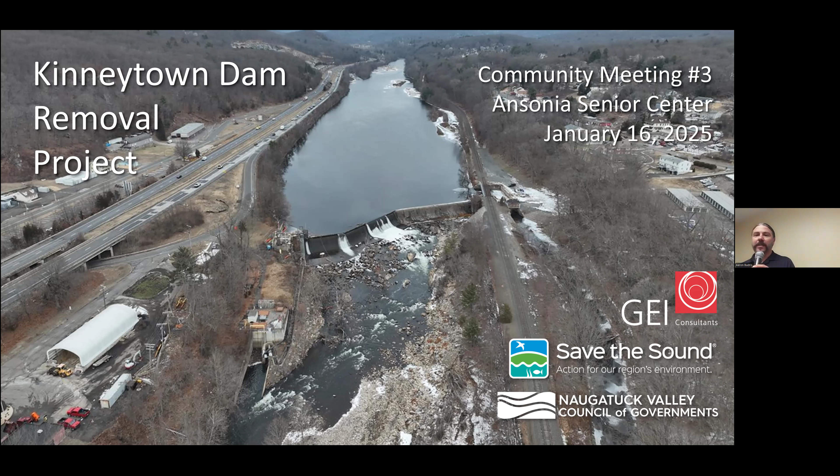So we'll do some introductions, go a little bit through the background, go through some project updates that we have from the last meeting, and then we're going to introduce the engineers that are now on board, that are going to be overseeing this project.

My name is Aaron Budris, I'm the Environmental Planning Director at Naugatuck Valley Council of Governments, or NVCOG. We are one of 9 COGs in Connecticut, set up to conduct regional planning, help coordinate municipal efforts of member communities, support municipal planning, and provide services and assistance as needed. Our board, our bosses, we report to the 19 chief elected officials of our 19 towns, and we work mainly on transportation, land use, and environmental planning issues.

I'm joined tonight by some of my colleagues at NVCOG. Craig Stevenson is a project manager, Craig's in the back there. Ricardo Rodriguez is our brownfields coordinator. Desiree Blanchard is our communications and community engagement coordinator. Christine O'Neill is our environmental planner, and Rick Dunn, our executive director, is in the back here.

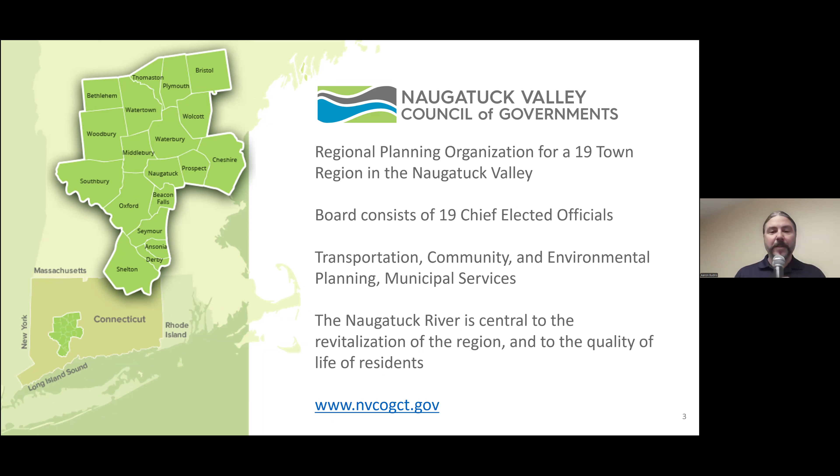I'll hand it off here to Paul. Thank you, Aaron. My name is Paul Woodworth, I'm a project manager and the director of the ecological restoration team at Save the Sound. So I manage both staff and projects and the staff that are managing projects. Save the Sound is a regional environmental nonprofit that works on environmental policy and climate policy. We protect open space lands, we monitor water quality in Long Island Sound, and we watchdog polluters, and we implement restoration projects much like this one.

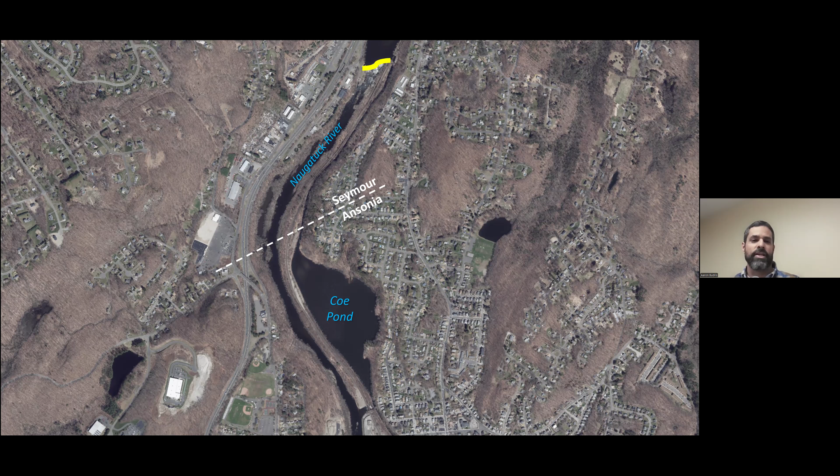Shifting now to a close-up of the Kinneytown Dam - we've been talking about Kinneytown Dam, but Kinneytown Dam and the entire hydropower site there is actually a combination of structures. This is the Kinneytown Dam, that's the footprint of it, 22 feet in height, a concrete structure, about 450 feet across the channel. That's a recent aerial of that.

But the other feature that's been brought to light, which I think has been ignored over the years as this was being maintained or operated as a hydropower facility, is this other earthen dam that extends the full length from Kinneytown all the way down to the Ansonia spillway. This earthen structure contains the canal, a canal reservoir, and also the Coe Pond Dam. The canal is only about 5 or so feet of depth of water, but Coe Pond itself is like 15 to 20 feet of depth of water, so very different features there.

Running parallel to that earthen dam is the Waterbury Metro North line. Up near Kinneytown, the Metro North line is close to the river banks. But as you go downstream, or south, that rail line drops down in elevation, and it's at the toe of the Coe Pond Dam, about a 15-foot earthen dam that stands above the rail line there.

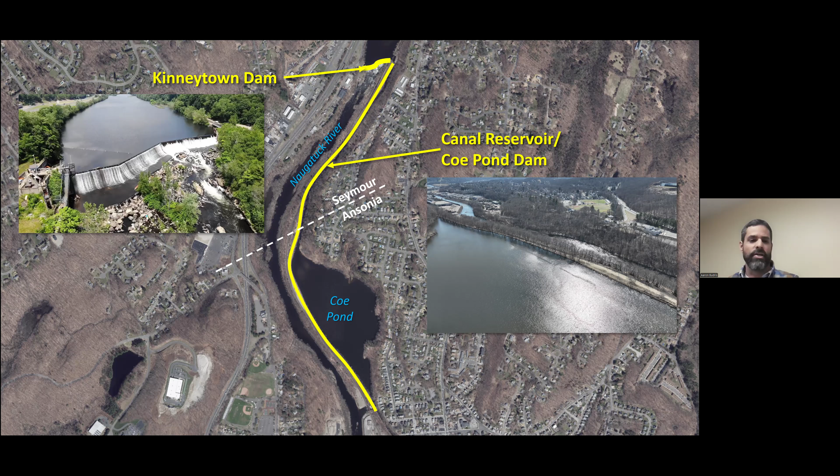So really, it's a complex of multiple structures. The Kinneytown Dam has a canal gatehouse at the top, or the north end of the canal, and the canal itself that extends. Kinneytown Dam is comprised of a powerhouse, which we call Unit 1 powerhouse, and its fish ladder. Then down on the south end is the Ansonia Dam spillway with its Unit 2 powerhouse.

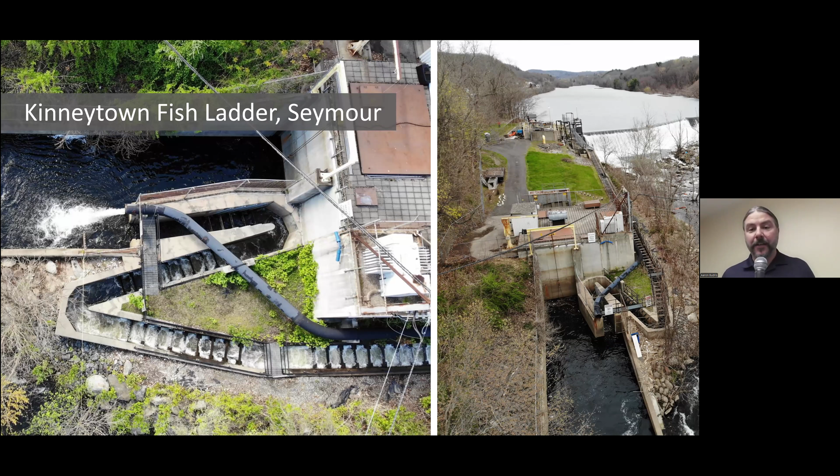What we found out was that fish are supposed to be able to pass Kinneytown. As a hydroelectric facility, Kinneytown Dam is regulated by the Federal Energy Regulatory Commission, or FERC. In the 1990s, FERC called on the dam owner to facilitate fish passage as part of the implementation of a Connecticut DEP effort to remove barriers to fish passage all along the Naugatuck River.

A fish ladder was constructed at Kinneytown Dam in 1999. That ladder has never been effective, especially since around 2013 when the Unit 2 powerhouse in Ansonia went offline and has never been returned to service. That completely altered the flow of water over and around the dam.

The potential to restore fish passage through the ladder was dealt another blow in 2020 when Unit 1 powerhouse went offline, with no plan to restore that unit. So currently, there's no way to control flow through or around the dam, and the fish ladder is now completely non-functional.

While it was fish passage that originally drew our attention to the Kinneytown Dam, as we began looking into fish passage issues, other concerns also came to light. The facility is no longer operational and has produced no electricity since 2020. It's in really poor condition and is no longer commercially viable as a hydropower generator.

The previous owners made very little or no investment in maintenance, and it's out of compliance with its FERC license exemption at this point. The cost of bringing the facility back online and into compliance far outweighs the revenue it could ever produce selling power to the grid. The owner has effectively abandoned it and has told FERC they do not have the ability to make even minor repairs to it.

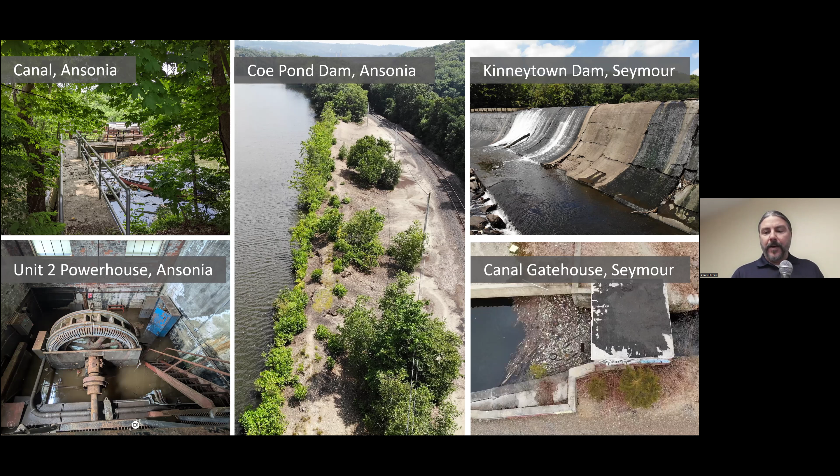For those reasons as well, in 2022, when Connecticut Department of Energy and Environmental Protection updated their plan to restore diadromous fishes to the Naugatuck River watershed, they strongly recommended the removal of Kinneytown Dam. So with all this in mind, we began focusing on finding a way to remove the dam.

In 2022, funding became available under the Infrastructure Investment and Jobs Act through NOAA. NVCOG, with our partner Save the Sound, applied to NOAA's Restoring Fish Passage Through Barrier Removal grant program. We had strong support from the dam owner, the governor, both local communities, our federal delegation, DEEP, Fish and Wildlife Service, EPA, and others. We ultimately received an award of $15 million to begin the Kinneytown Dam Removal project.

The big picture of the project is that we're working right now to acquire it through the Connecticut Brownfield Land Bank, a nonprofit that holds properties with large environmental liabilities while they can be remediated. The plan is to conduct engineering and design of the dam removal, and work through FERC to decommission the dam facility.

We found that there are sewer lines running underneath the impoundment that belong to the town of Seymour, which need to be relocated. That's also part of this project, to move those so that when the dam does get removed, there are no negative impacts.

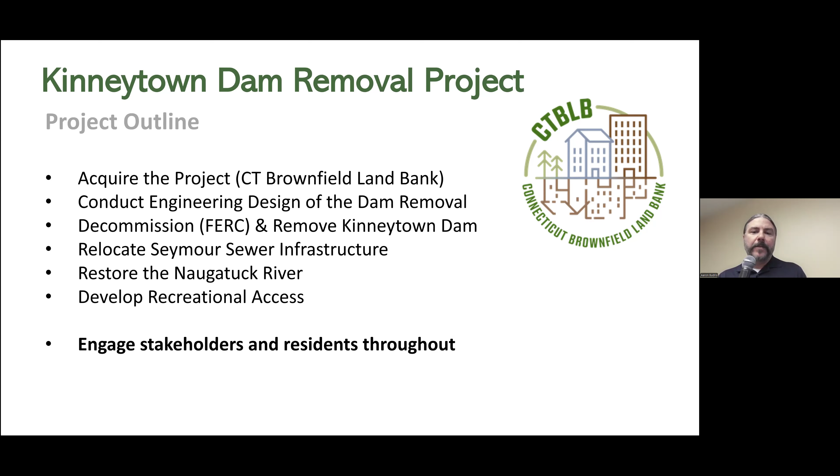Our timeline at this point: we're working to acquire the project, and that acquisition is set to take place by the end of this month. The design and engineering is beginning as we speak. We're continuing to work with the EPA to assess the sediments behind the dam and basically the entire project. This year, in 2025, we will be working on a sediment management plan with EPA.

We're going to continue having these meetings regularly, and the sewer siphon design for the relocation of the sewer engineering will be completed this year as well. Next year, in 2026, we'll continue the design and engineering, focusing on permitting and FERC decommissioning, and the sewer siphon construction project should be ready to go to construction.

In 2027, we're hoping to begin the dam deconstruction, and in 2028 conclude it, and hopefully turn a restored river back to the communities.

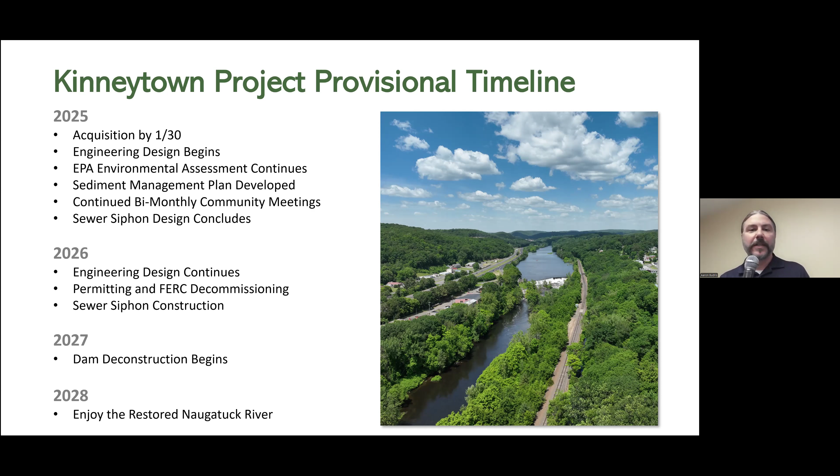The funding we've received: I mentioned the $15 million. We've also received $1.6 million from the state of Connecticut through the Supplemental Environmental Program. The EPA targeted brownfield assessment that is ongoing has exceeded $900,000, which is sort of a match from EPA. We received $3.42 million in congressionally directed spending for the sewer relocation project, and $270,000 from DEEP, from the state of Connecticut, to design the recreational trail through the facility.

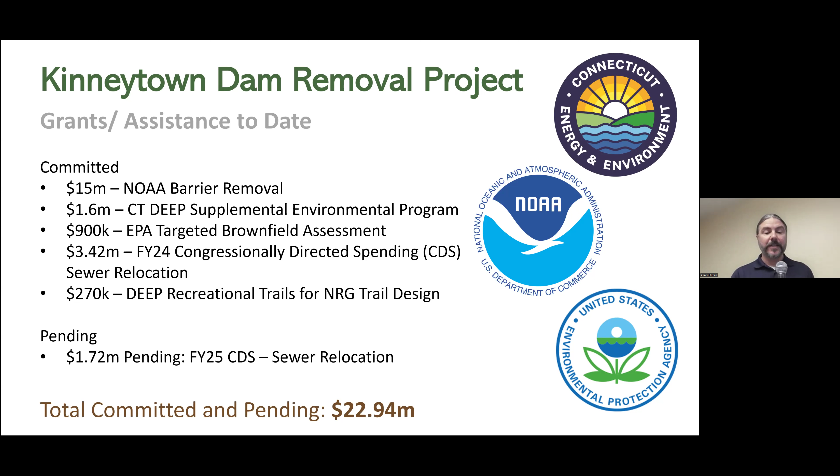We are still waiting to hear back on an additional $1.72 million in congressionally directed spending that we requested for the sewer relocation project. So total committed and pending, we have a little under $23 million. We understand that's probably not going to be enough to finish this project, which is a good segue into the updates we have for you tonight.

Right now, our project team is preparing an application for two NOAA grant program opportunities. One is the program we received the $15 million through, Restoring Fish Passage Through Barrier Removal. We're going to be requesting $8 million from that program, with a deadline of February 10th, so we're wrapping up that application now. There's also a Transformational Habitat Restoration and Coastal Resilience grant opportunity due in April, and this project is eligible, so we will be applying for that as well. We're exploring all other funding options right now.

For the acquisition, we've completed all of our due diligence, or the Connecticut Brownfield Land Bank has. We've completed a survey and done all the property research we needed to do. As Paul mentioned, the Coe Pond Dam, we realized during our due diligence the extent of the safety issues at that dam, and we completed a mitigation construction project to lower the water level in Coe Pond and the canal to reduce the risk of overtopping or failure.

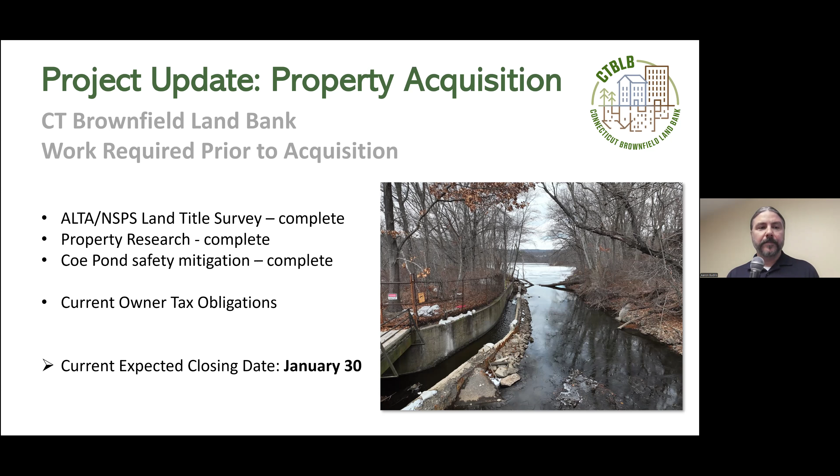Paul, you want to give a quick update on EPA?

During our last meeting, we had announced that we had just finished up the first round of sampling. That report is still available on the NVCOG website. It has initiated discussions with DEEP, and will begin initiating an analysis by GEI.

But basically, it's also turned us back around to EPA to conduct a second or follow-up round of sampling. That is scheduled to happen this spring, potentially early summer. We're still discussing the results and what more information we need in order to better assess and characterize the sediment for figuring out how to mitigate.

As we've been talking about GEI, we did go through an engineering services procurement process back in July. We issued a combination of requests for qualifications and requests for proposals. We had a mandatory site walk on August 7th. We looked at both the Kinneytown and Ansonia sites, showed all the engineering firms as much of the sites as we could. We received 3 submissions from consultant teams.

They provide us qualifications and a general project approach. From those submissions, we conducted 3 in-person interviews with all 3 teams. Of those interviews, we invited 2 of those teams to submit full proposals and received a scope of work with a detailed fee proposal. We did a very close cost comparison between the 2 teams, decided which one was the best value or the best sort of bang for the buck, and went into a negotiation over the final scope and fee.

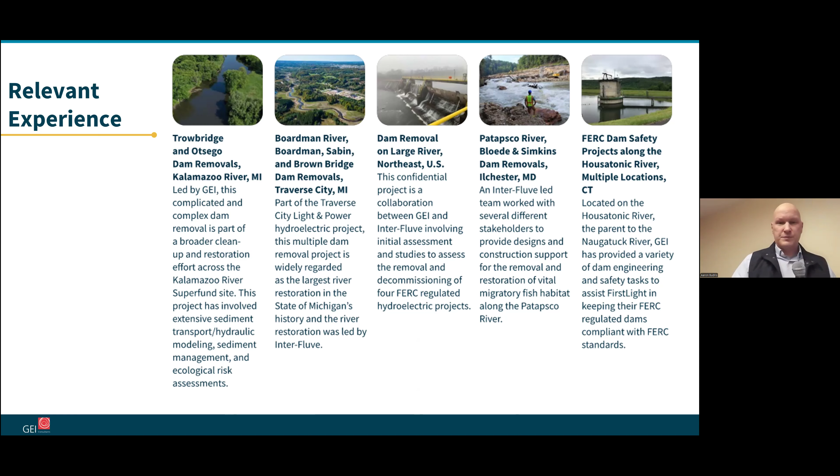I'm going to let Kristen talk a little bit. All right, I'm Kristen Connell.

The key objectives of this project initially were to establish fish passage, but that's not the only thing happening here. We're going to restore river function so it can carry flood flows and act naturally, and provide community access to the Naugatuck River, as well as remove this big safety risk, the Kinneytown hydroelectric project.

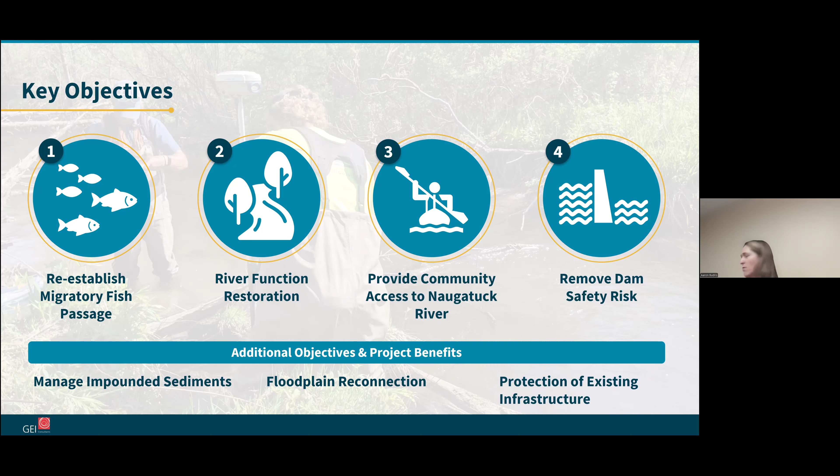Specifically, we're looking at targeted fish species: the American eel, river herring, sea lamprey, and American shad. So as we look to remove the dam and reconfigure the stream channel, we want to make sure the flows passing through are good for these fish species. We want to make sure there's enough depth to the river, that there's resting pools, and just enough to pass them up to the next fish passage that was created relatively recently.

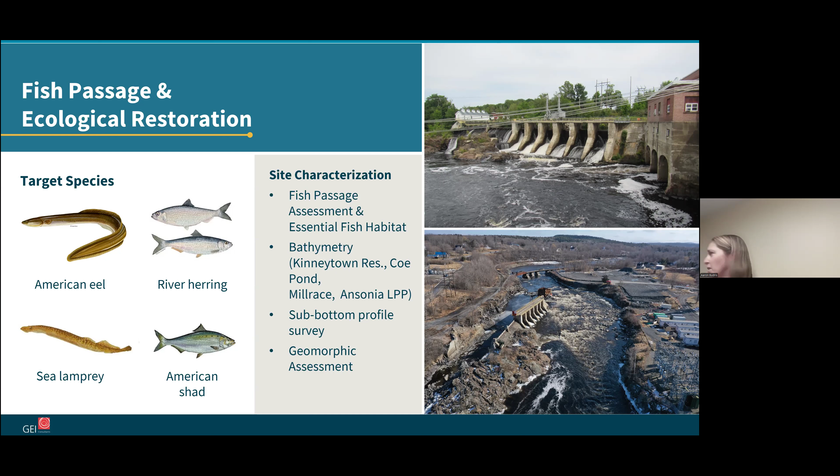As we look at different configurations for removing the dam, that's going to change how water coming down will move that sediment downstream. So a lot of what we'll do, at least initially, is numerical modeling of different flood flows, rain events, river levels, and velocities, to understand how that will move the sediment down and interact with different configurations of breaches of the dam that we could integrate into the design.

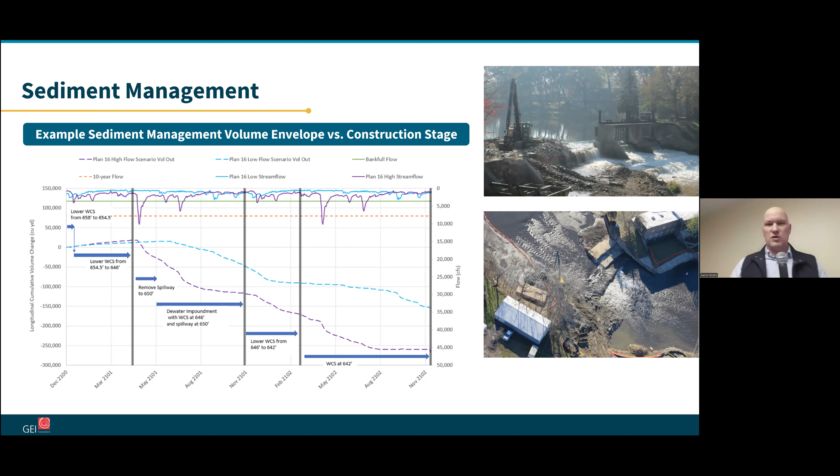Ultimately, we want to get to a place where the stream channel goes back to a more native stream channel with a defined stream bed, and then have an overflow section where flood flows during storm events have some more floodplain area to help attenuate those flood levels.

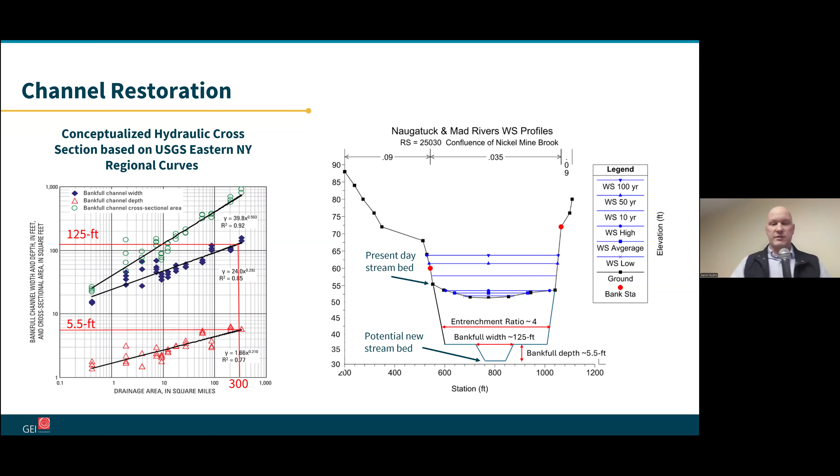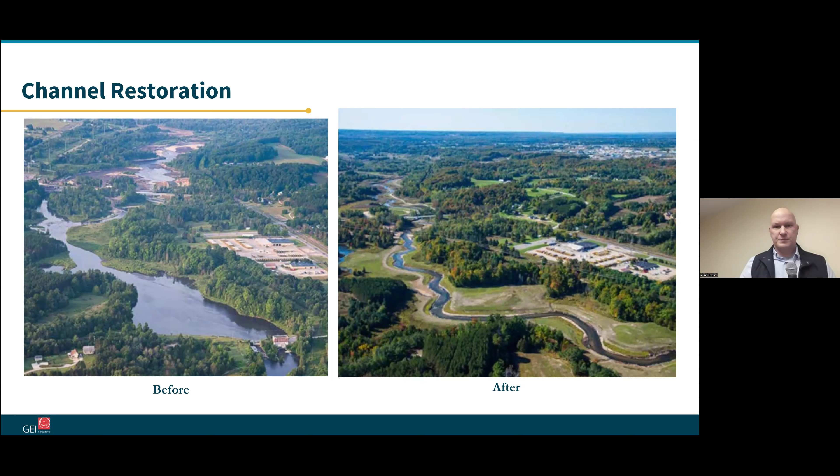There's a lot of permitting involved in dam removals, and it's going to be a long timeline to get the permit applications processed. We need to address the FERC requirements, but that's an end-stage thing. Ahead of that, we need to go through discussions with Connecticut DEEP and the Army Corps of Engineers to make sure they're comfortable with our design plans. Save the Sound has already engaged with Connecticut DEEP, US EPA, and the Army Corps of Engineers to discuss this project and their concerns, so we can hit the ground running and start the permitting process relatively early.

My approach is early and often—we want to talk to the regulators all the way along. We don't want to surprise them with anything. We want them to feel heard, and we want you guys to feel heard too, so it's a relatively smooth project process. We'll prepare the permit applications after the design plans are created, and we'll have conversations with regulatory bodies to address concerns in engineering, ecological impacts, or sediment management as we go along.

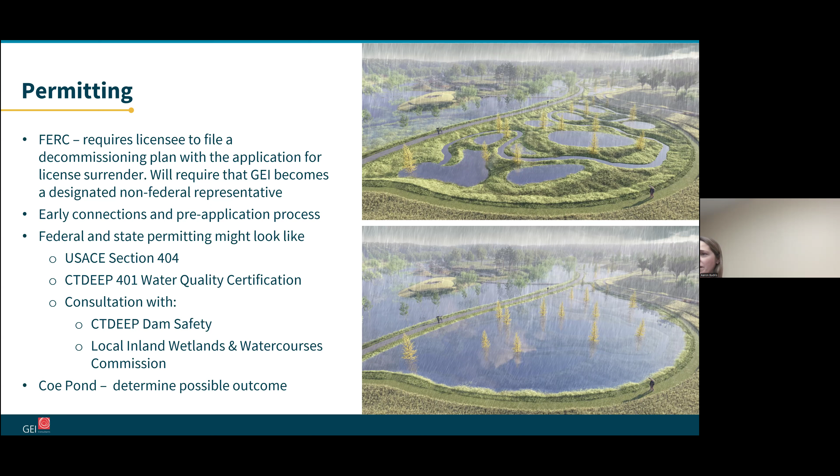Just as Paul mentioned, we're really just getting started—we haven't even gotten under contract yet, but our team is ready and excited to hit the ground running. The first step is to collect more information. We're going to work with NVCOG and their relationship with EPA to help put input into where we'd like to see more sediment sampling collected. We want a broader geography of samples to help us figure out the thickness and characteristics of that sediment.

We also need to do a fair amount of surveying to get good base plans and mapping to work with. From there, we'll start developing different hydraulic models, running different scenarios, and looking at alternative ways to safely remove the dam. Once we get through that process, we'll have a preferred alternative that we'll take through design development—meaning more formalized design calculations, assessments, and developing construction drawings and specifications.

As Kristen mentioned, once we get started a little bit, we'll have something to share with the community and regulatory agencies, and we'll touch base with them as we go through the process. So by the end, they're fully informed, we understand their concerns, and we can integrate those into the design—resulting in a project that's supported by both regulators and the community.

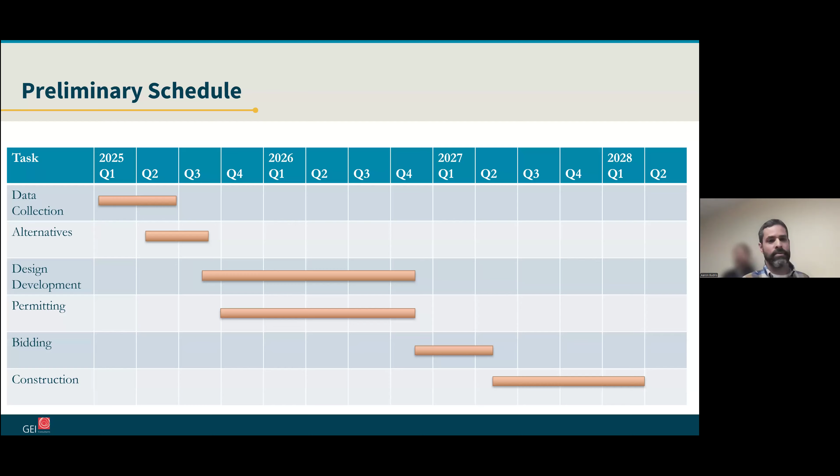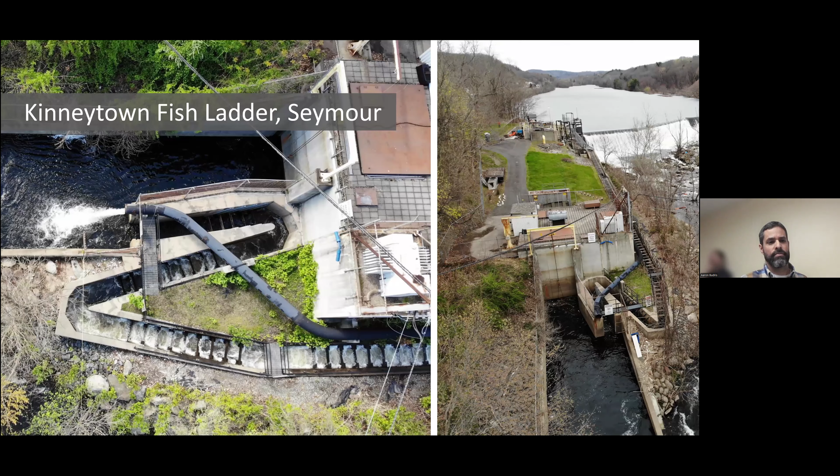Some dam removal projects don't remove the entire extent of the dam. You might leave an abutment, you might leave a portion of the dam in place, maybe to protect infrastructure. I think that still has yet to be determined here. I think we're assuming most of the spillway will be removed, but for example, on the eastern shore, which is right up against the rail line, that might be a good location where the spillway is saw cut and the abutment is left in place to remain as a stabilizing feature for the rail line.

That's just an example - these are things that need to be discussed in the engineering analysis. On the other side, the West Bank, there's the on-ramp to Route 8. That might be a good area where there's already a retaining wall. That retaining wall might need to be stabilized, might need scour protection at the base. There's really deep water in that area. Where exactly the channel will reform and remeander there is still sort of uncertain to us.

Looking at this image, the deeper water is on the left-hand side as you move up, and then it switches over. So there are shallow bars that are now more visible than they were before because the water level is a little bit lower. You can kind of see a single threaded channel moving through that impoundment. Where exactly it sizes up is to be determined, but those are the things we'll be looking at as we move into the design phase.